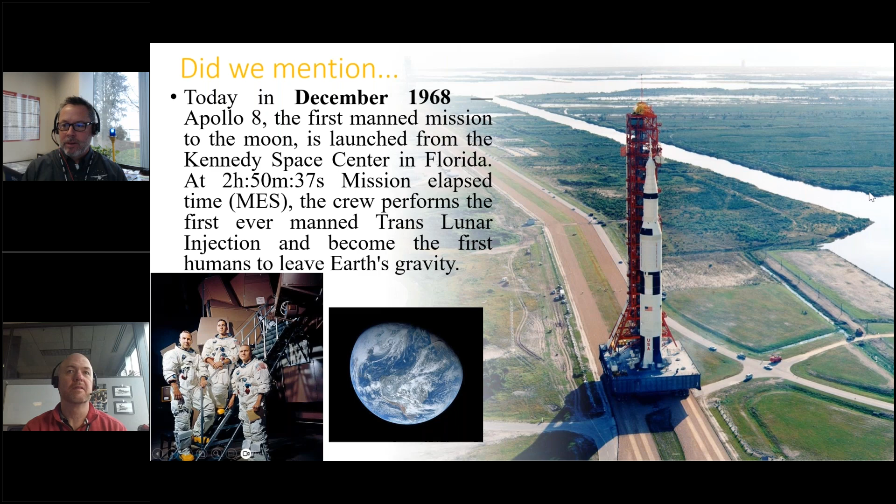Stephen, what happened today years ago? In 1968, Apollo 8 launched. It's the first manned mission to the moon. I was looking at the stats here. He goes, yeah, 2 hours and 50 minutes. They actually did their maneuver to escape Earth's gravity using velocity. They were just below escape velocity, but used the moon's pull to get them out. So I think the total mission time, according to the Wikipedia page, was 66 hours to go. Made several rotations of the moon and came back.

Very cool. I decided to do 2 slides of this because this photo of the Earth was the first photo taken by a person of the full view of the planet. So one of the mission gentlemen looked back and took a photo of the planet. And just the chart here to show you what their mission plan was, coming and going. Just thought it was a really cool thing. Yes, that is pretty cool.

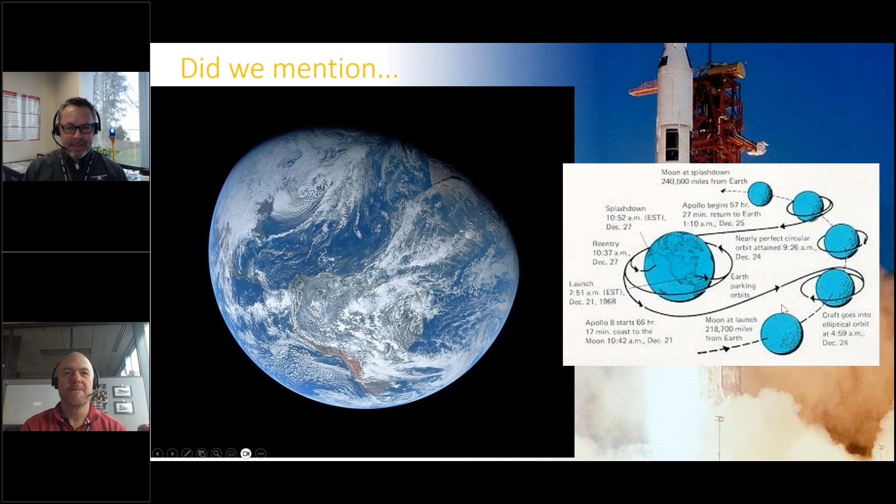It's out of this world. Yeah, it's horrible. All right, you guys. I'm gonna get a soundboard loaded up for you. Anyway, thanks for doing that, Stephen and Dan.

And so what are we doing today? Well, we're talking about aerodynamics, of course. It is a huge topic. So I just had to kind of pick some things that I wanted to do. And I know Dan and Stephen know this. I decided to go nuts with lift. So we're going to talk a little bit about lift, but we're really going to talk about some really advanced stuff with lift and see what we can do. I even tested this on one of our colleagues here just to make sure that it was going to make sense. So I'm hoping you guys will enjoy that. That's more for fun, not so much practical, but then we will get back to the practical.

We'll talk a little bit about stalls, accelerated stalls.

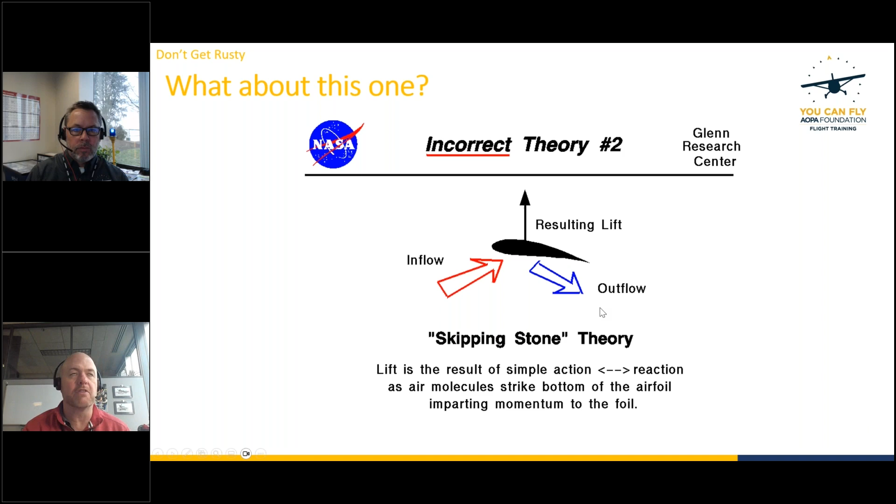And so they say the air hits the bottom, bounces, and it pushes the wing up. Every action, there's an equal and opposite reaction. So there is some truth to that. It is true that Newton's third law, that for every action there's an equal and opposite reaction, is true. But the problem with this one is it completely leaves out the airflow over the top of the airfoil. So this is not a good explanation when they say only the bottom of the airfoil matters. That's not true. Any questions so far, Dan, as I'm rolling through?

No, keep going. This is good. We've got some comments. I'm capturing the ones that we can pick up later, but for now, we're doing great. Thank you. All right, cool.

All right, and incorrect theory number 3. I remember this one vividly when it was shown to me, because I was on my journey trying to discover, asking questions, kind of bothering the heck out of my CFIs. And as I was essentially doing my own CFI training, trying to do some research, because I knew that I couldn't just figure it out on my own. I wanted to find the right folks.

Somebody drew me a Venturi on the board and said, look, here's a Venturi. You know the Venturi, the pipe with the pinch in the middle. And they said, if you look at it, this kind of looks like a wing, right? The bottom part. Well, just erase the top one and there you go. It's a Venturi, same thing. That's how it works. That's Bernoulli.

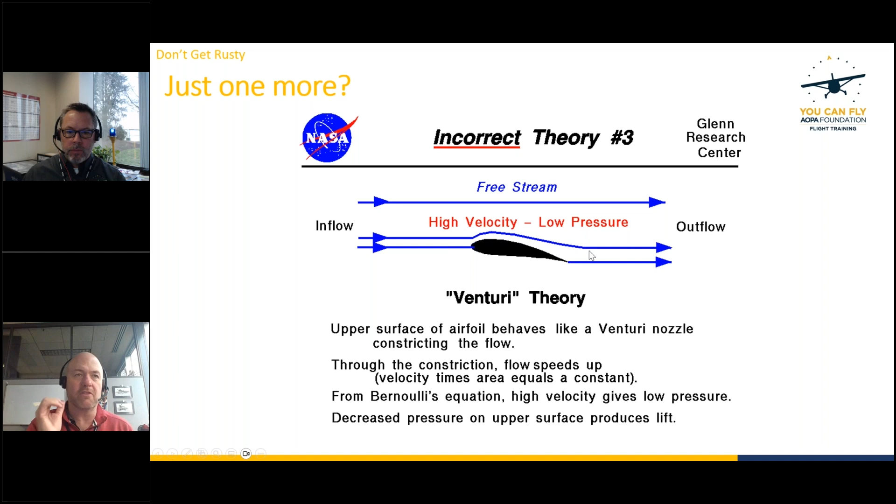And of course, this is not correct either, this half Venturi theory, because all the aerodynamicists say that there is no pinch on the top. It doesn't work like a tube. There's a free stream, there's atmosphere. This is not the way it works. And in fact, if you try to do the math using this one, it does not account for the lift at all. So this is not a correct or nearly completely accurate one.

So what do we do? What are the reasonable explanations? And by the way, don't worry if you are some of my super educated aerodynamic folks out there. I'm going to go deep on this one. I've spent a lot of time doing research, so we're going beyond this. We're going deep, and so I'm hoping you enjoy that purely for fun.

But let's say practical purposes. If I'm just instructing somebody, I just want them to have a good explanation of what's going on, and that is trying to avoid at least most of the limitations of our explanations. It's these two. And of course, this is where people get heated. Which one is it? Is it Bernoulli? Is it Newton? Is it both?

Of course, we know our Bernoulli, that the airflow goes above. In both cases, air goes over the top and bottom of each wing. In the Bernoulli one, the airfoil has a shape to it that affects the airflow and creates a low pressure system. The airflow accelerates, creates low pressure up here according to Bernoulli's principle. And then down below the wing, there's a positive pressure.

The only one that I sometimes hear, and that I have learned from doing my research, is that some people will say it creates suction up here and it pulls the wing up. That is actually not correct according to the physics. The correct way to say it is actually that this relatively higher pressure air here pushes the wing up into that low pressure.

In fact, the book that I read this in, and I'll talk about this gentleman in a minute, he basically says that pressure doesn't work that way. Pressure doesn't create suction. It's actually positive, higher pressure pushing into the area of low pressure. So high moves to low. Low does not suck high. So that's just one. But the Bernoulli one is perfectly fine.

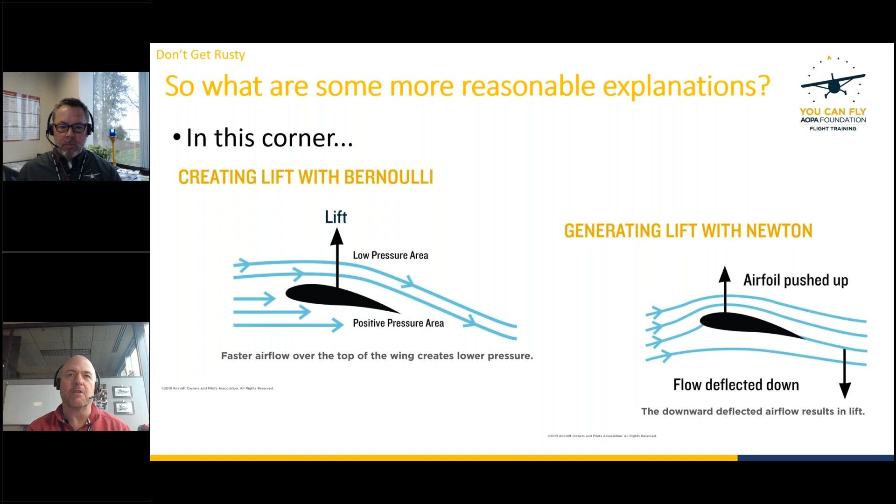Thank you. Okay, so these are the basic explanations, and honestly, this is probably as far as you need to go, practically speaking. But I'm an aviation nerd, and for me, the driving question, all because somebody told me that equal transit theory thing, was: what is actually happening? Why don't we know? Why is this so difficult to explain? So here's where I ended up, years and years in the making, because I wonder about things like this.

I came across, and this was just the latest in a long line of books I've read, this book called Understanding Aerodynamics. I have a link to it on the handout because I'm going to talk about part of what's in here. It's written by Doug McLean. He has a PhD in aerodynamics and worked for Boeing for a number of years as an engineer. At Boeing he did a lot of the coding for the CFD, the computational fluid dynamics software they used to design airfoils. So I think he's got some credibility. The guy knows what he's talking about.

And so what he did was the vast majority of this book, let me just see if I can show you, there is just lots of math. This was written for people that know fluid dynamics and physics and all that. Almost every page has equations in it and all kinds of stuff. So if you're into that, check it out. Unfortunately, I don't have the training in math to do that part.

But the cool thing, why did I buy this book? In there is a section where he tries to do a physical explanation in 2D, not in 3D, for people that are non-technical, AKA not the math. He tries to explain it for the majority of us that don't have that background. I saw somebody mention the Euler equations, and there's the Navier-Stokes equations, and there's the Kutta condition and all that other stuff. Yeah, he's got all that stuff in there. So this is the guy, and he tries to explain what's actually going on as best he can.

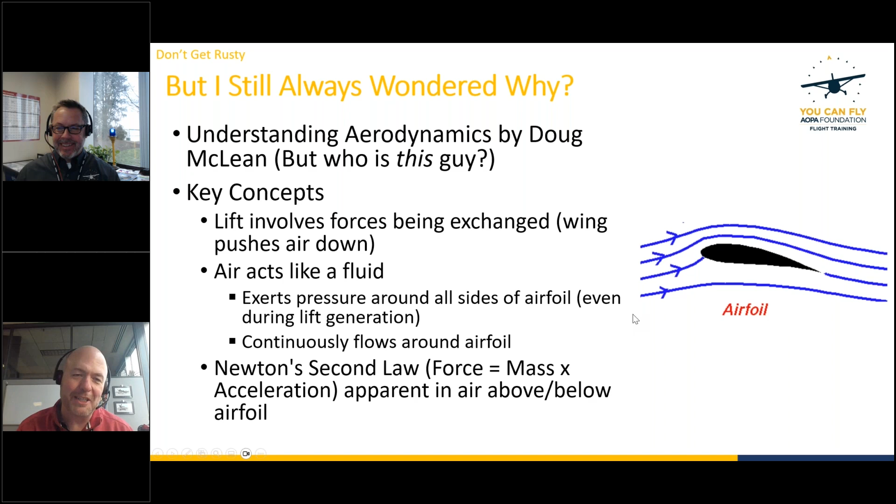Somebody, I see that one there. Equations, I know, the equations are too hard. So this is the only equation we're going to use today. I honestly wish I did have the background to understand more of the equations, because I probably would like it. All right, so now let's start getting into this. See if you can follow along with me. I did test this out, so I'm hoping this makes sense. Again, practical for flying, not so much, just because I'm curious and I'm a nerd.

Here it is. Airflow changes during the generation of lift. The first part he says is that when the wing starts to move, there are two fields created above and below the wing. And in fact, there's two types of fields as well.

There's a velocity field that's created and a pressure field that's created. And one of the key things he says is these things don't just happen right along the airfoil surface, they happen well above it. In fact, you can see this here, and this is from an old wind tunnel diagram, and you can see right here, they cut the smoke off in the lines in the, what is it called?

The wind tunnel. And as the airflow moves, you can see as it approaches and gets over the wing, look how much it's accelerating over the top, and look how high it goes. It's not just these couple of lines accelerating, the whole thing does. So the wing is affecting air well above and below it. So that's kind of a key feature here.

All right. So what he says is that an airfoil, this is going back to that question somebody asked earlier, in order for an airfoil to create lift, it has to have camber, has to have a positive angle of attack, or it has to have both. All right, so you can have either camber, positive angle of attack, or both.

All right. The other thing he says is air is getting pushed down, and if you were to follow the flow, you can see when the air is on those lines, if it wasn't cut like this, you could see how the air does get pushed down by both the top and bottom of the wing. Now, here's something interesting. He says the speed above the wing always increases, always. So it's something we already learned. But this is the one I didn't know.

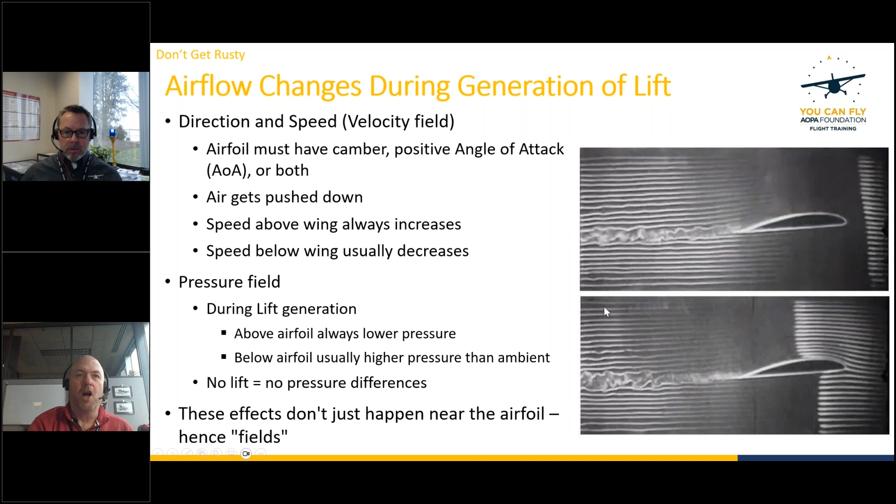All right. If there's no lift being created, the airplane's sitting on the ground, there are no pressure differences. And then again, as I mentioned, these effects don't just happen near the airfoil. They happen well above and below. So it's affecting it in kind of these graduated areas out. All right. Now, here's where we get real. Okay, so here's the part that I need to explain. So here's where he talks about, and so now the thing that I was wondering is, who's going to win?

Is it Bernoulli or is it Newton, right? Is one of them going to win? All right, so the first thing he mentions in here, and he breaks this down in steps, and it's pretty heavy, so I'm hoping I'm doing a good job explaining what he talks about, is he says that, remember I talked about the fact that air is always just pushing on stuff, right? There's always pressure around everything. Like I said, the airfoil is still getting pushed on no matter what.

He said that what happens is the air parcels above and below the wing, notice this, see higher pressure above them, which causes the downward turn of air. What he's talking about are these arrows right here, these downward facing arrows. If we have low pressure here that's being formed, the air pressure up here that's ambient is higher. So it's going to push. Remember, push is high to low. So this is pushing down.

And of course, we know the wing is moving as all this is going on. So as it's pushing down, there is an acceleration. There's a force coming this way, and that's going to then change, in this case, the direction of the flow. Force equals mass times acceleration. Acceleration could be a change in velocity or a change in direction. And so he said, this is what's causing that downflow of air over the top of the wing.

The same thing here. We get high pressure forming here that's higher than the ambient pressure here most of the time, right? So that is also causing a downward pressure, which is what's pushing the airflow down this way. That's why we're seeing that downflow. So it's because of these two things. All right, hope that one's clear.

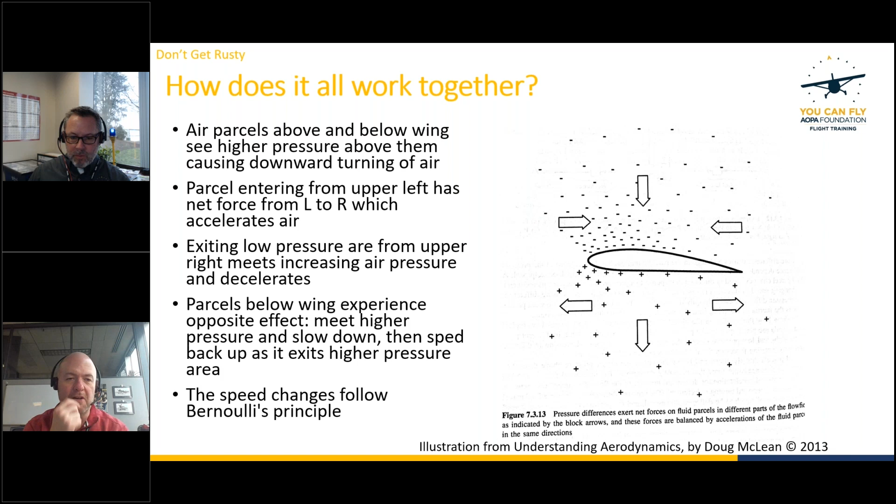So all right, let's go to the next slide then. So that's the basic thing. Hopefully that kind of sets up the idea. Here are some summary things based on what McLean is saying. And by the way, this is all filtered by me trying to explain it. If you want to dig in more, go check out his book, Understanding Aerodynamics by Doug McLean. I've got the link on the handout for you too.

All right, so he says there is a reciprocal cause and effect relationship between velocity and pressure fields. They are working together and it's reciprocal. It's the cycle happening, right? So the high pressure here is pushing the wing up, not the suction on top. Remember, high pushes into low.

Here's an interesting thing he says too: how are these pressure fields being maintained? It's because this higher pressure up here is containing that area of low pressure, while it also is then deflecting the air downward. And he said the same thing's happening here. The downturned flow sustains the high and low pressure areas. And so of course, this is creating low pressure as it's pushing down as well. And then air is being affected by Newton's second law. Keep that in mind.

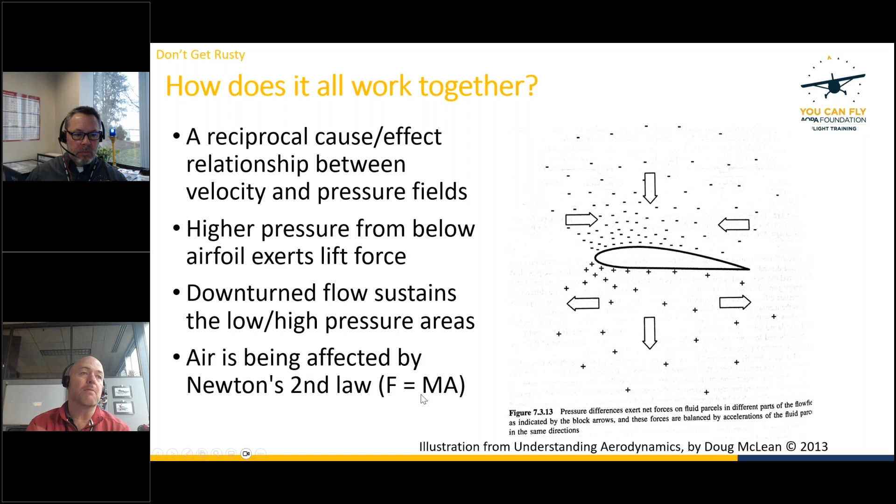And then the last part, he says the pressure differences here, all the arrows, are causing the change in flow of both speed, like I talked about going horizontally, and direction. This is the part that's pushing down. The changes in flow, speed, and direction also cause the pressure differences. And he says, is this sort of getting something for nothing? He says no, and he explains kind of what I did with the idea of the forces and acceleration, that they're just feeding one another. He said, avoid thinking of this in a linear cause-effect relationship.

Now, let me bring it to a head and then I'll get into some other topics, but like I said, this is tough. What did I get out of this by learning all this? I kept looking for this simplified answer. Notice that this is only in 2D. We know that real wings are in 3D. What I got from him was, this stuff is complicated. He has 500 pages on aerodynamics using all the math and all the equations. He said that this section was the hardest part for him to write, because they know all the math. The math is not in question. They understand how all the equations work.

He said basically what's going on is that this is fluid dynamics. When you get it in 3D, it's really complicated. Like you said, you got the Navier-Stokes equations and the Euler equations and all this other stuff. We can't calculate those in our head, which is why we have a hard time envisioning what is going on here. So any explanations that we have are limited by that. So what I took away was, I get the idea of what's happening. It's probably not going to happen that I'm going to get a simplified explanation, because there isn't one. It's complicated. Luckily, though, do we have to know all this stuff to fly an airplane well? Nope, we don't.

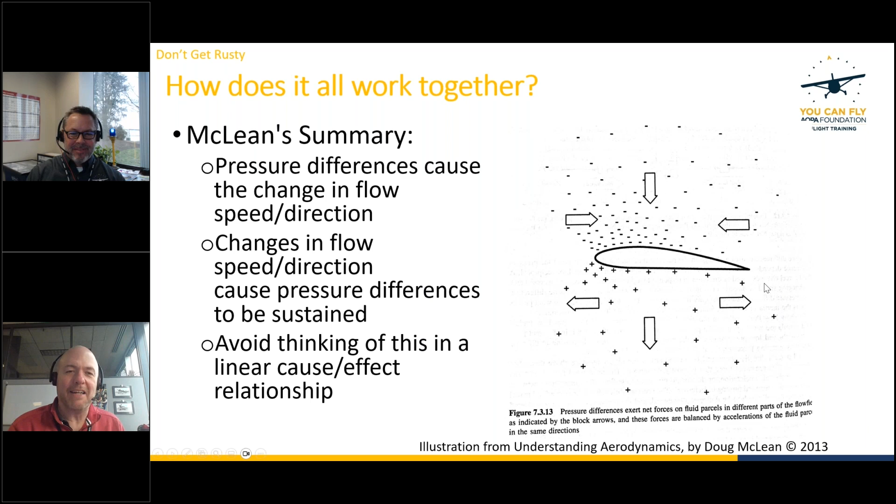Okay, yes. And then somebody said, just change my answer back to magic. Not bad. It is kind of cool. It's still amazing. All right, let's go on to the next one here.

So let's get into some practical stuff that I think you guys could use. We learned about lift. Why do we even learn about lift in the first place? Well, the real reason we have to learn about lift is because we need to understand angle of attack and critical angle of attack, because how exactly lift is being created is not critical to us flying the airplane, but what is critical is that we understand how the wing behaves, especially when it gets to critical angle of attack, because that gets us in trouble.

Yes, and Dave, I do have a thing on ground effects, so hopefully if I've got time, or I may do it during the Q&A, I can do that when I see that question right there.

All right, so when could stalls happen? I'm going to do this relatively quickly because I'm assuming most folks out there are familiar with the critical angle and all that, because what I really want to talk about is accelerated stalls. When could a stall realistically happen to us? Well, maybe we're in the pattern and we're trying to follow a slower airplane. We're in a Bonanza or a faster Piper or even a Cessna, following, let's say, a Cub or some kind of light sport type aircraft.

Like, I'm trying to think of what's the one that Carlo flies, the one that's like a big biplane.

Anyway, something slower. So maybe we try to stay behind them in the pattern and we get too slow and we can get into an inadvertent stall. We're getting too slow on final for whatever reason. Maybe we're not paying attention. We're trying to stretch a glide. Maybe we've had an engine out and we see where we want to go slipping away, and so we keep pulling the nose up trying to get to it. We could get into a stall, or even just get behind the power curve, where, like in slow flight, we have to add more power to go slower.

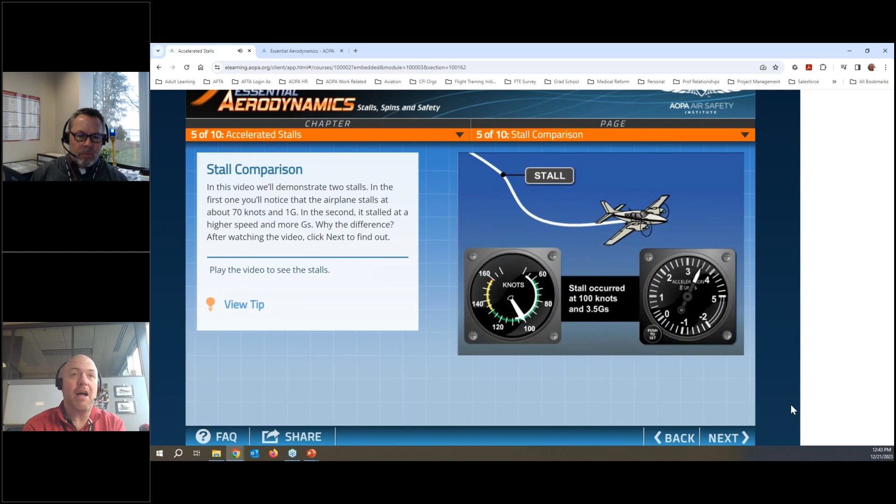So check out the next one though. In this case, we're going to do an accelerated stall. All you have to do is exceed the critical angle of attack. Notice the airplane diving. Airspeed is increasing. We're up probably over 100 knots as far as I can tell there. Jacks it up, exceeds the critical angle, and we get a stall right then. And we're going to show it again right here. That stall happened at 100 knots and at 3.5 Gs. You overloaded the wing in that case, all right? Bad news.

So why do we want to be aware of that? Because it can happen in any phase of flight if you jack up, you really pull on the controls. The biggest thing is fly responsibly. And Essential Aerodynamics, the course, I definitely recommend you guys go check it out. The key there is they were really trying to caution people against buzzing. People that go down low to the ground, trying to show off to their friends, and end up trying to do a dive and then pull up hard. That's when people end up doing an accelerated stall.

But this naturally flows into the other part that I wanted to do, which is maneuvering speed. I'm sure you guys all know maneuvering speed. Dan, I'm sure you remember too. If the air gets bumpy, we slow down to maneuvering speed. That way, what do you remember, Dan? It keeps the airplane from getting...

Sorry, I'm reading comments here. Mile a minute. No worries.

Nope, keep going. Keeps the airplane from getting damaged. This is how we protect ourselves so the airplane won't get hurt if we're flying into turbulent air, that sort of thing. So let's take a look at this. This is from Rod Machado's book. Give him a shout out. He has a new book. Actually, this is his old book, Private Pilot Handbook.

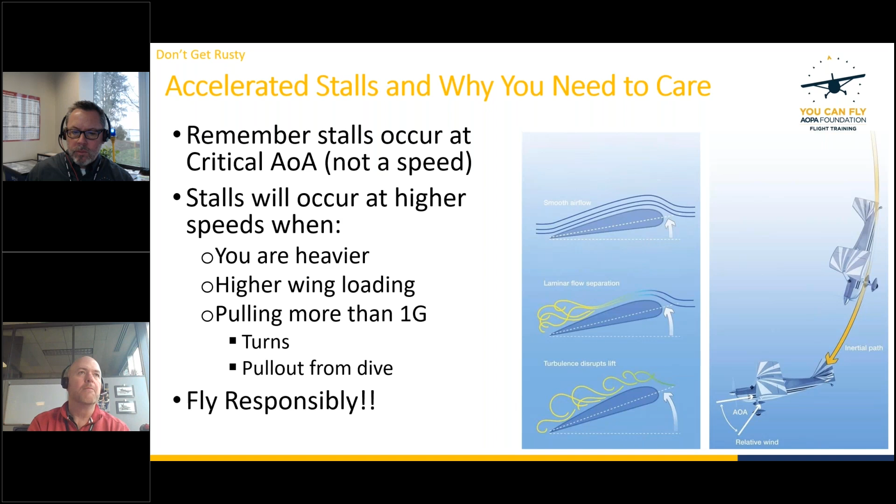Somebody just asked, what if you go lower than the calculated maneuvering speed depending on weight? Flying slower is not going to hurt you. Of course, it's better to look at your manual and figure out what it would be. Rod, in the article that's linked that I gave you guys, does explain a basic rule of thumb you can use, which I believe was something along the lines of for every one something, and that's the part I can't remember.

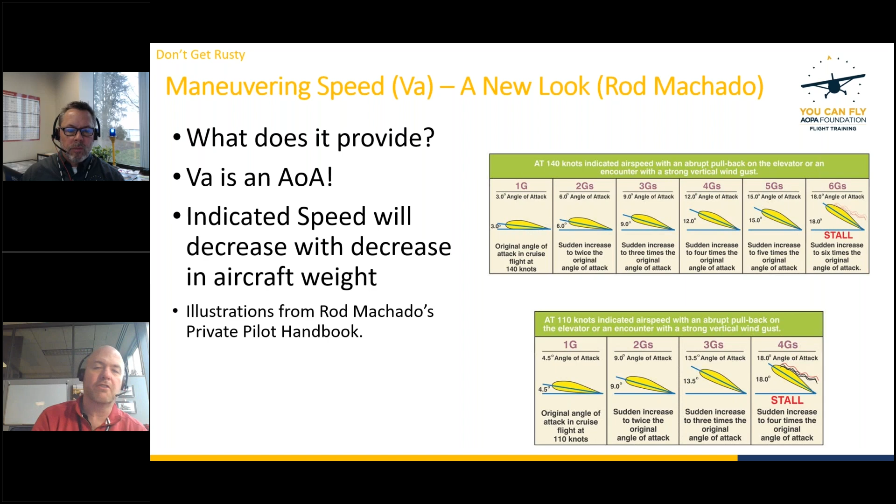Look up the article on maneuvering speed, but I think it's for every 1% you decrease your weight, decrease the maneuvering speed by 2%, something like that. But don't take my word on that. Look at the article, get the right calculation that he gave. And there's also math equations you can use too.

All right. We're coming close to the end of our time. I know that somebody asked about ground effect. I do have that on here as needed. But the big things, what can you do next? If you're really nerdy like me and you like this stuff, check out Doug McLean's book, Understanding Aerodynamics. I learned a lot from that. I had to read that section several times to actually get my brain around it. I hope I did it justice.

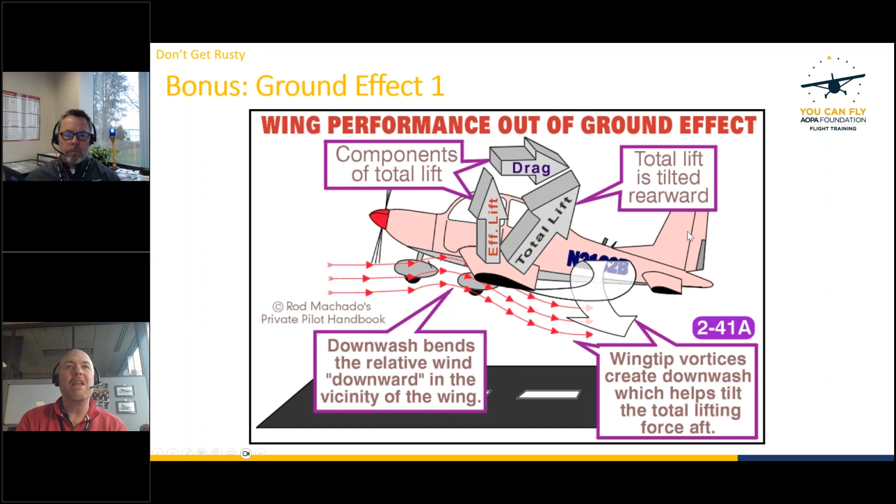So when we come into ground effect, out of Rod Machado's book, I love these pictures, the vortices get disrupted, so they can't have as much of an effect on the overall airflow under the wing. Effectively, this airflow is not getting bent down as much. We think of the relative wind in terms of straight angles, but in reality it's a flow. It's not getting bent down as much, and so the total lift force is actually allowed to move forward a little bit.

When it moves forward, more of it is effective lift and less is induced drag. And so that's why as we enter ground effect and those vortices get disrupted, the airflow starts to not get bent down quite as much. And so more of that force is lift, less of it is drag. And that's why we end up not having to fly at as high of an angle of attack to maintain our aircraft above the ground.

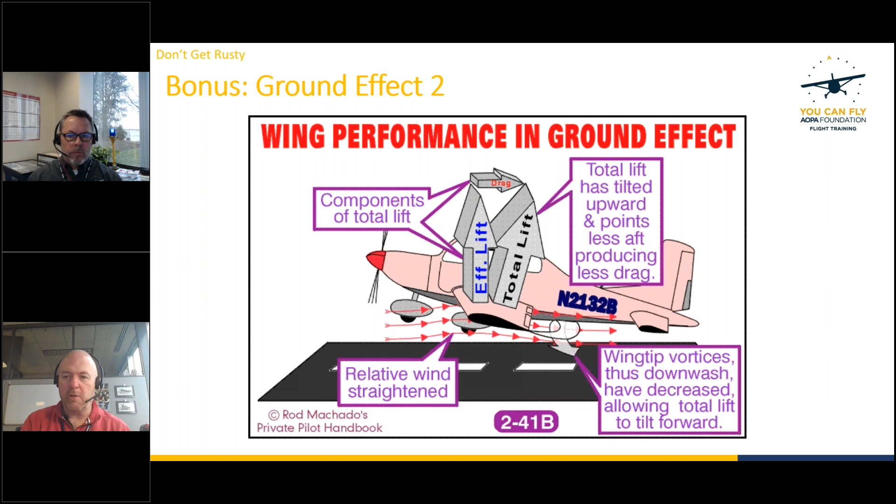Does that make sense? Mm-hmm. Hopefully. All right. Let's see, we got 4 minutes left. Let me go back to the one person also.

This is a very similar, related topic. They were asking about adverse yaw. Somebody emailed us in the mailbag, I called it. They said, why is there adverse yaw in a turn? Why does that happen? Well, we can use this same explanation, this idea of effective and induced drag, effective lift, total lift. When we're turning, in this case, the airplane is going to be turning to the left, towards where my mouse is spinning right now. So we're turning this way.

What do we do? We lower this aileron to create more lift. Well, when we create more lift, we also create more induced drag, right? So we're increasing the camber of the wing, we're increasing the angle of attack effectively, and so it's going to create more lift here, which creates more drag. More drag here is going to pull the airplane to the right, even though we're trying to turn to the left. And over here, the same thing's happening in an opposite way.

Here we are deflecting this aileron upwards, and so that's going to actually decrease the angle of attack, decrease the camber of the wing. We get less lift, therefore less induced drag, less force on the wing. And so this wing is going to want to just not resist that rotation in the opposite direction. And that's why we have to use the rudder to then correct for that, to make the airplane turn in the direction we actually want it to go and stay coordinated. So it's really about keeping the airplane coordinated as we're turning.

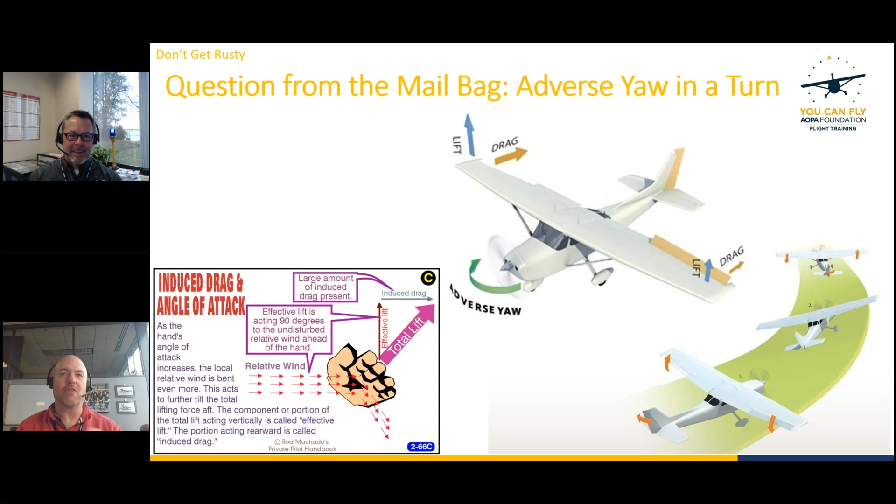Okay, I hope that answers all the questions at least we had ahead of time. I'm afraid of what I'm going to get here in the sense of I'm hoping I can answer it because, like I said, that lift explanation is pretty much at the limit of the depth that I know when it comes to that. But hopefully I can give you some practical stuff on the other things. All right, go ahead, Dan. Oh, actually, let's do this.